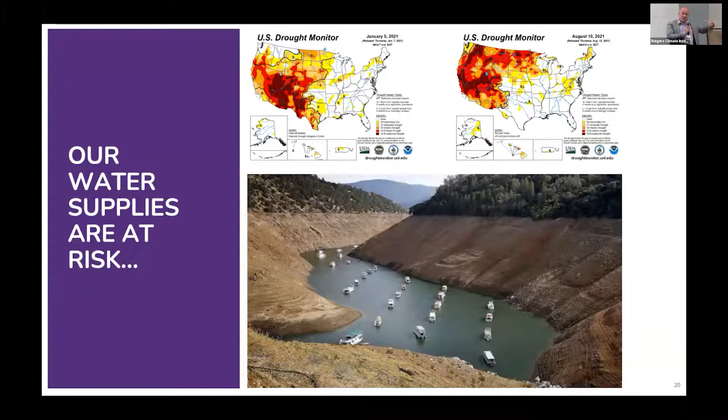Those maps on top of that screen that you're seeing there are continuing to get worse, continuing to get more frequent. And you'll say, okay, well, we're on the East Coast here, right? And thank you for those across the pond being here as well, but you have some of the same challenges. It's not just a West Coast problem. We have other challenges ahead that are also local conditions that we need to work through together. Go to the next slide.

So as Yasmin really nicely put into context the city of Hoboken, this is happening more and more around the country and around the world. This is a picture showing a wastewater treatment plant that is completely underwater, right? And so we had Hurricane Sandy on the East Coast, which really impacted everybody in the eastern US. A couple of years after that, we had Hurricane Harvey, right? That was really impacting the South Central United States.

And just recently this year, a couple of months ago, we've had Ida, and Ida impacted not only the South Central, but also the East Coast. And a lot of recovery efforts are still going on. So this campus itself was under a lot of water. Towns around here were inundated under a lot of water. And this is happening more and more, getting more frequent, getting more impactful to those communities that are around us.

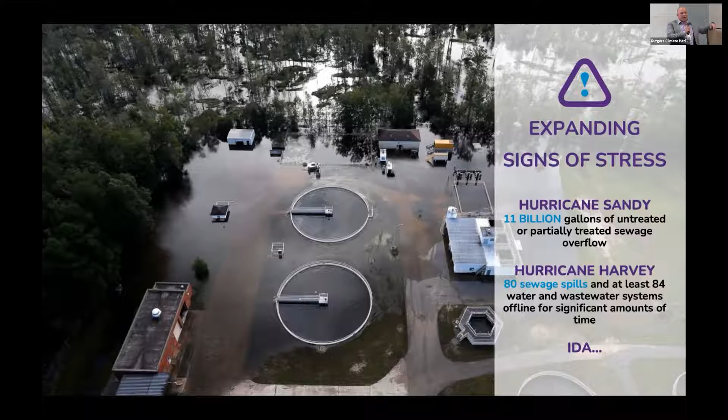So what can we really do about it? How are we going to manage this going forward? Slide. Right. So I work for a company called Natural Systems Utilities. We design, we build, and we operate local, community-based, decentralized water treatment and reuse systems, to try to help with some of these challenges that lie ahead.

We have about 100 systems that we manage for communities in the Northeastern United States. About 80 of those were directly impacted by Superstorm Sandy. Not a single one of those systems went down and violated permit conditions, while we had large centralized systems that were down, discharging raw sanitary wastewater into our local water resources, creating a lot of environmental impacts and personal impacts as well.

And so the reason that these systems didn't go down, didn't fail, didn't violate any permit conditions is because they are local to those communities. They are place specific. We do not have large horizontal pipes that go for miles and miles through many low-lying conditions, where when you have an isolated problem, now you're creating a regional challenge.

Our largest challenge was getting fuel to the generators to keep power to the facilities to make sure they were running and providing clean, affordable, safe water and sewer services to those communities. We were able to work with the fuel stations that were local, keep those generators running, and keep the environment safe and people having access to that water.

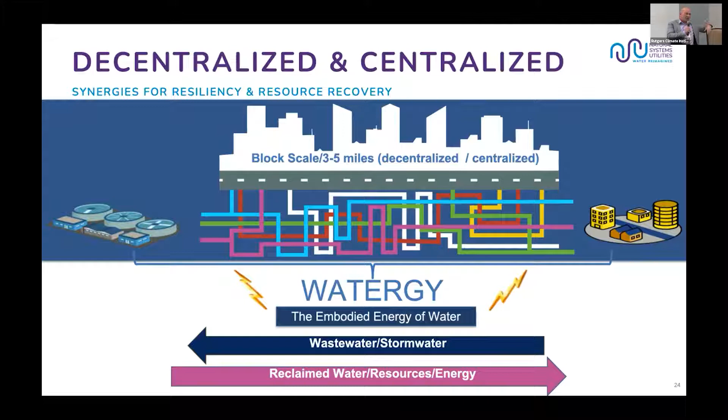So let's use these microgrids, just like in the power industry, create a sustainable supply of that water to reuse it and recover that energy at the same time. So here's some case studies on how to do that. Go ahead. This is a diagram of Battery Park City, Lower Manhattan. And what you're seeing here is the building envelope on the right-hand side.

First, we're trying to conserve as much as possible, use low flow fixtures. All of that wastewater that's being generated is going to the basement of the building. We're treating that right there on site and recycling back up as much as we can for reuse, in the form of flush water, irrigation water, cooling tower water, laundry, sidewalk maintenance. We're reducing our water consumption by over 50%.

But more importantly, we're reducing our discharge into the sewer, many of them overburdened by combined sewer overflows that Yasmin went into. We're reducing that by even more because we're using water for external purposes like evaporative cooling. So we're reducing our discharge into the sewer by 60, 70, 80%.

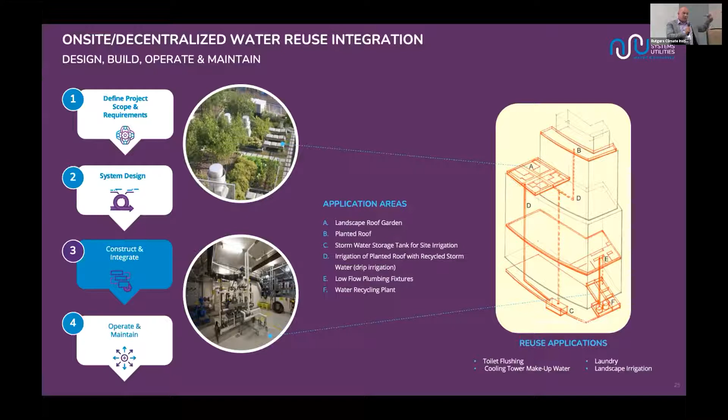And so you can do this at the building scale. You can do it at the block scale. We're going to talk about the block scale in a second as we wrap up, okay? Next slide. Right. This is a process flow diagram about how it's done, right?

We're not going to go through each of the steps, but you'll see all of the uses on the left-hand side. And what many people get confused about is, well, should I do gray water reuse? Should I do black water reuse? Really depends on your local condition, right? Gray is good, I say, but black is better, okay?

When you have more uses, you can get more reuse, more opportunity, the value for that water is better, the return on the investment is better. And you don't have to have multiple pipes and plumbing to separate your gray from your black. So where you do have those types of uses, we prefer to do complete water reuse and take as much as we can and recycle as much as we can.

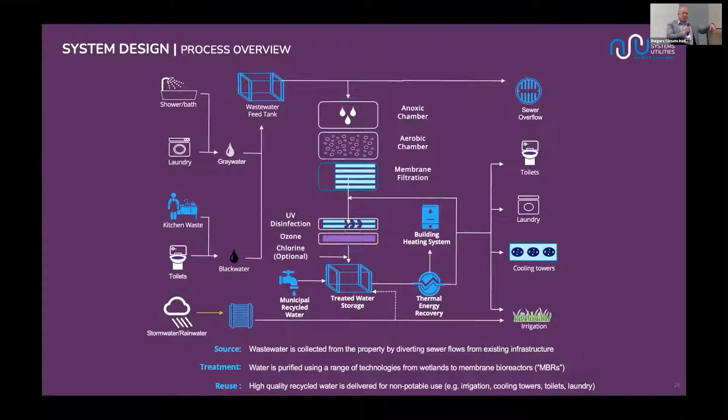Next slide. So what are the results here? This image that you're seeing up on top is Battery Park City. Okay, it's a 92-acre area, about 20 million square feet of mixed use development space, a lot of it urban infill from the initial trade towers. Okay, and we have about 10,000 people living in Battery Park City.

The buildings that are highlighted in green there all have in-building water treatment and reuse systems, reducing their water footprints by over 50%, reducing their discharge into the sewer by over 60%. Okay, so really, really nice example of how you can do things in existing infrastructure, redevelopment areas, and how to integrate these solutions to improve those conditions around.

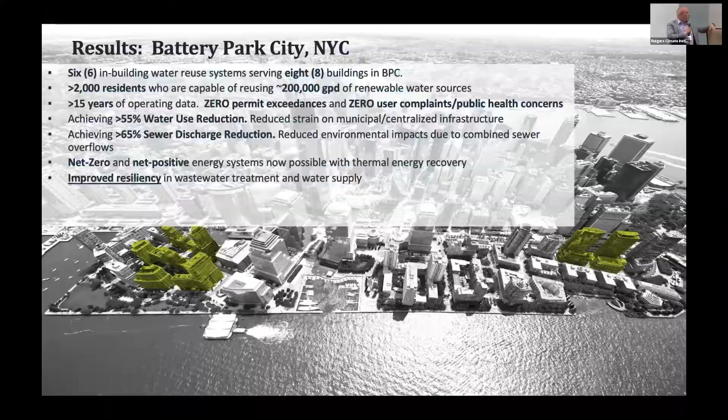Saw this diagram from Yasmin, but bringing even more local context to not only water conservation, but also reduction on our discharges into our waterways. The right side of this is showing you major combined sewer overflow areas throughout the five-borough area, okay, in New York City. So those large red dots, all right, are greater than 500 million gallons a year of raw, untreated wastewater going into the East River, going into the Hudson, okay, when it rains.

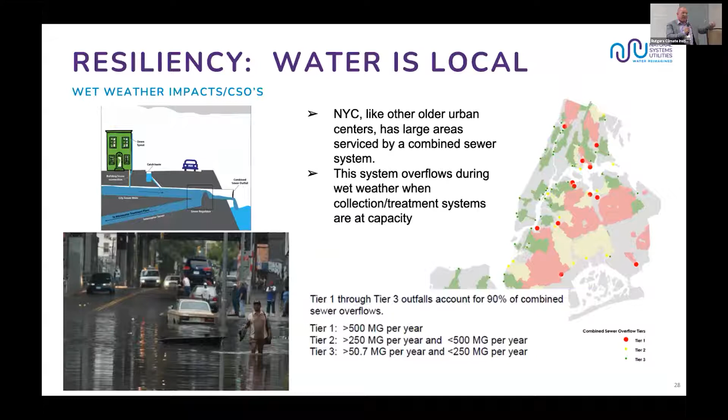We serve 9 million people in New York City, right? We have a lot of wastewater treatment plants, about 14, and over 1 billion gallons of wastewater being treated daily to service this community that is New York City, right? And when it rains, those treatment plants can't handle it. That water just goes out into the waterways.

That overall community is going to be discharging 400,000 gallons a day of wastewater. Right? Problem is, it's a really heavily burdened combined sewer overflow district. So not only are we going to be capturing as much as we can and reusing that directly in the community, we're also going to be treating everything, keeping it out of the combined sewer, and actually putting that into the East River to improve stream conditions. So reuse as much as possible, increase stream flow, and actually make that whole area mitigation for combined sewer overflows.

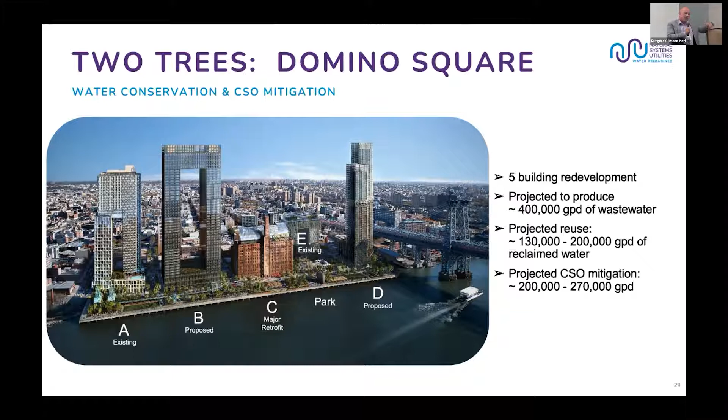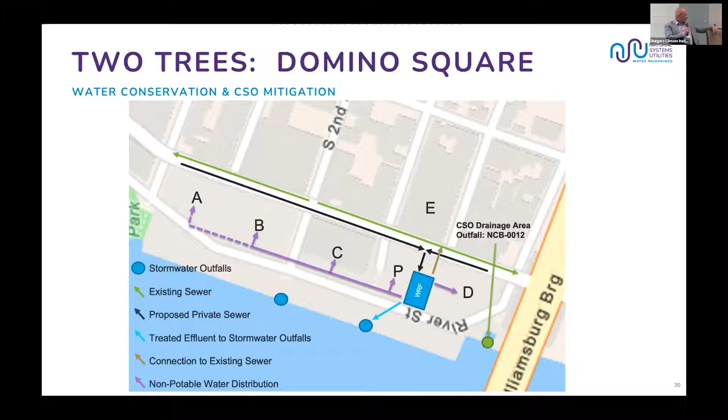And you can see that combined sewer overflow outfall in green is just south of the overall development. So we're going to keep that raw, untreated water out of that combined sewer so that it's all treated going in. Slide.

Right. And as we spoke about, it's not only about reduction in water, it's also how do we integrate our infrastructure to tackle our water energy nexus and tackle our water challenges at the same time as we tackle our energy challenges. When I gave this presentation decades ago, it was, okay, I can see it. This is great from a water environmental standpoint, right? We are treating water, we're keeping it local, reducing our water footprint. That's all great. But aren't you using more energy per gallon of water treated than the large centralized systems? Absolutely true, right? It's like economy of scale, right?

But we can get all of those water conservation initiatives and at the same time capture that energy and reuse that energy as well because all the users are there. We don't have miles of pipeline where all of that heat in that wastewater is just dissipating into the environment, right? I always say fish do not need hot water, right? So why are we discharging hot water into our waterways?

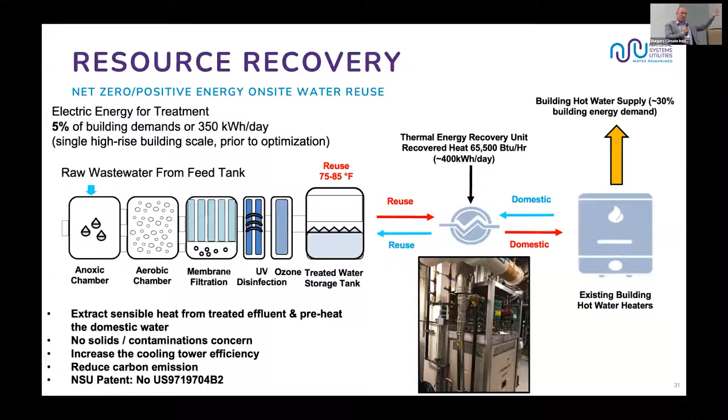Okay, so capture that energy, just like a refrigerator operating in reverse, take that thermal energy out of the water, use it to preheat all of the boilers and hot water needs in the community, and now you have net zero or net positive water reuse, and you're really capturing both of the benefits of water and energy, returning that to the... Next slide.

So in terms of implementing this in your neck of the woods, as you say, a lot of the challenges are, well, my regulations are different, or my conditions are different. Absolutely. Water is local, right? So we put together some guidance documents published by the Blue Ribbon Commission and National Water Research Institute to guide communities about how you do this in your area, right?

What are the challenges to work through? How do you get through some of those public health questions? And how do you treat this water? And what do you treat it to for those specific needs? All right, so take a look. It's published through WRF. You can get it online and take a look through it. All right, certainly here for questions as needed.

And the challenge is because we will need to stop screen share. And Pippa, then share your screen. I'm curious how this is going to work. Yes. Share screen. All right, there you go. Now you can share your screen. Gonna do it. All right. And here you are. And you can see it. Let me go to full screen. Let's see if that works. Let me know if that still works. It's black on my screen. It's black, but oops. Can you see it now? This looks perfect. All right. Okay. Alrighty. Go ahead.

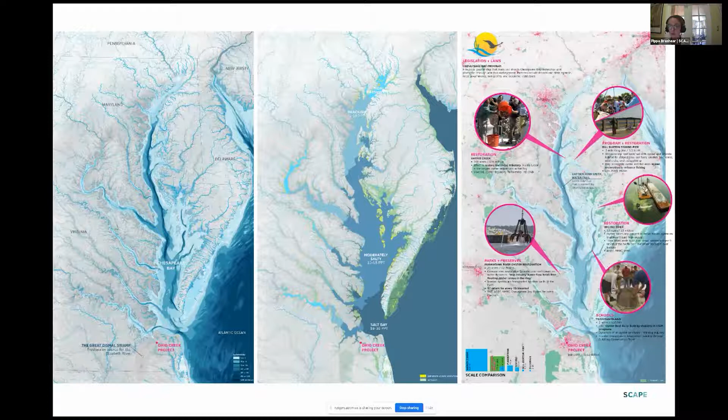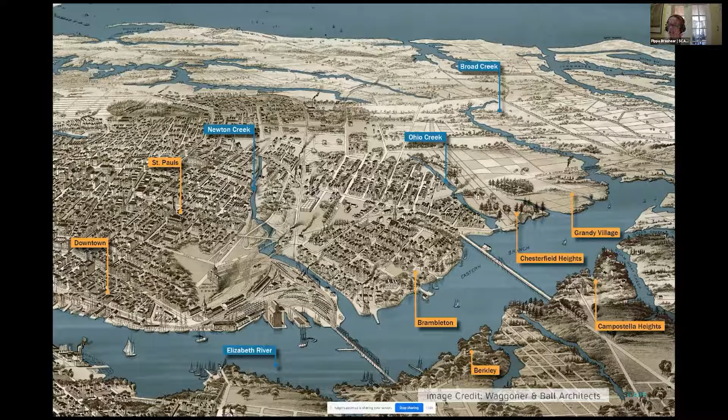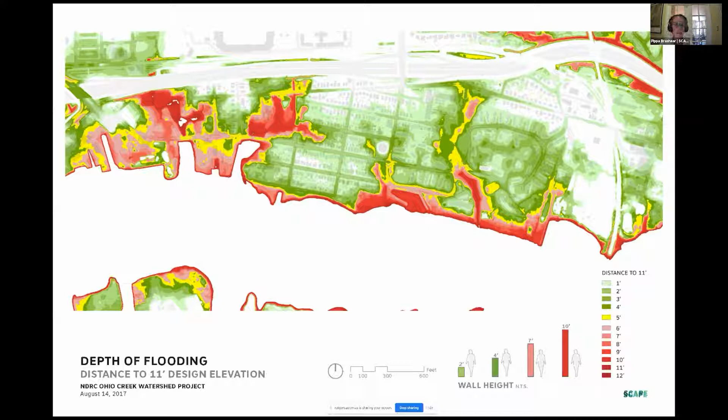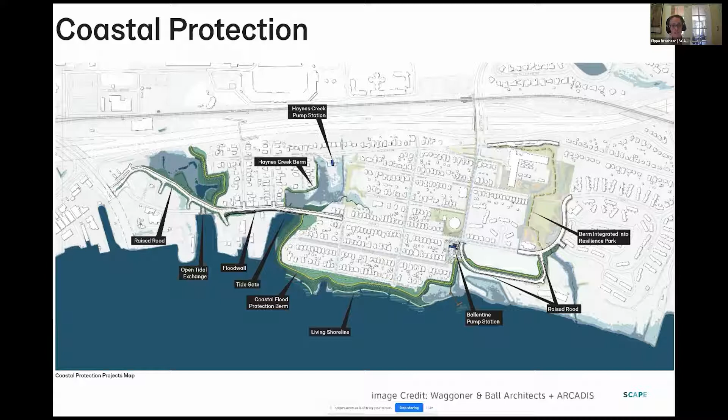And so if I look, this is just a depth of flooding map. You can kind of see these areas that would flood in that 100-year storm event. And they really start to mark the paths of these historic tidal creeks through the community. And so neighborhood-wide, this is a strategy. This is a resist strategy. It's actually very similar to the delay, storage, discharge approach that Hoboken is taking. It is a perimeter protection strategy around some of the areas that are really low lying and buildings can't be elevated, and an internal strategy to manage the stormwater, to delay that, to capture it, to store it, to discharge it through pump stations and locations.

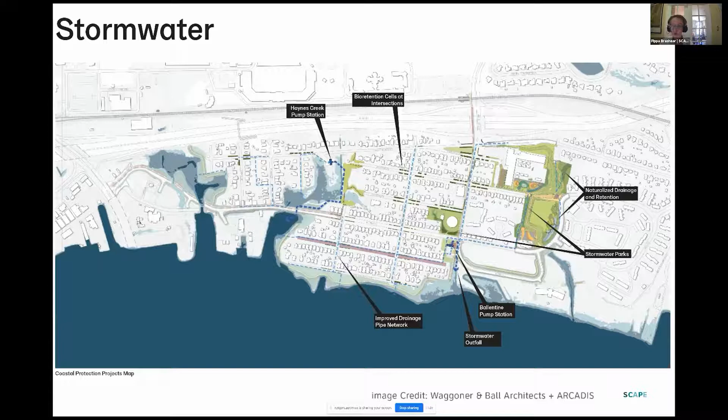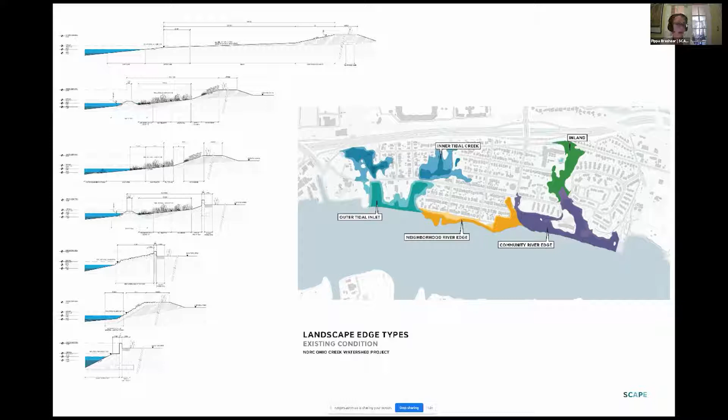And at Scape, we kind of plugged into this larger process. You've noticed some references on the slides. We work with Arcadis engineers and Waggoner and Ball architects and urban designers to really craft and develop this neighborhood-wide plan. But it's one thing to sort of think about the edge, but how is that edge itself resilient, and how does it start to give back and restore some of the ecological vibrancy and the cultural use that people have of the waterfront? And so as we knew that this perimeter protection was coming in, we started to look and develop these different conditions of shoreline that match the use and existing and potential habitats here.

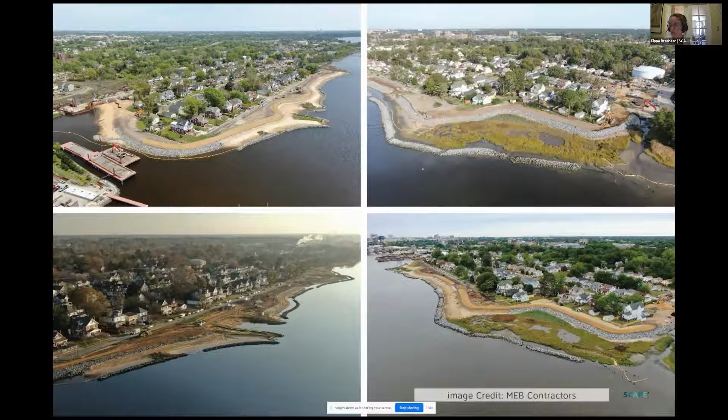But the other piece is, one of the places where the coastal defense was cutting through was a park, kind of in the middle of two different neighborhoods. One neighborhood was slightly less at risk as the buildings were built more recently and were elevated, and they could address it through infrastructure. And the other was very low lying. And so this park was not in the best of conditions, had barriers that cut it off from the community. It was also one of the roots of these historic tidal creeks.

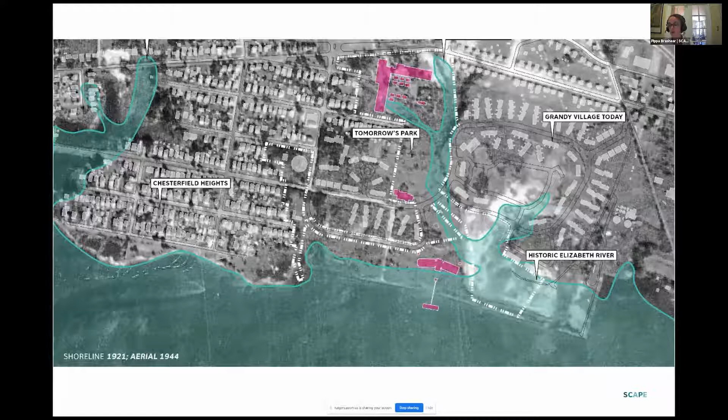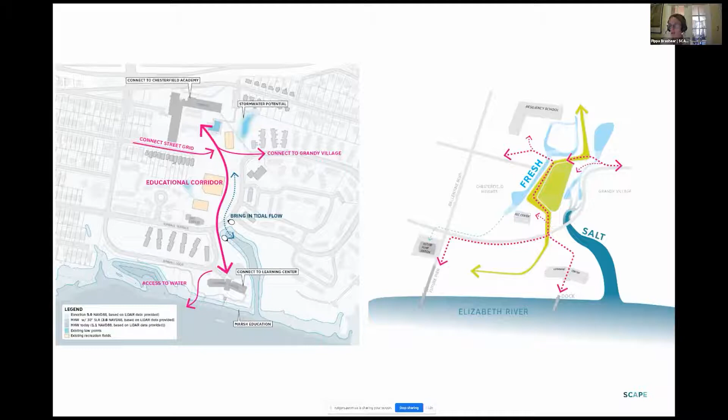And so one of our big assignments was, how do we redesign this park to make it do all of these things, to make it manage water, protect against coastal flooding, deal with the tidal flooding that's coming through this piped creek. And so we said, how do we start to connect the elements around it? A school, a learning center, a learning barge that was on the water, circulation between these two disconnected neighborhoods, as well as integrate flood defense. And it was an opportunity to talk to people about what they want the place to be. This was a park that people used to play ball, but it was actually sort of a divide between these two neighborhoods.

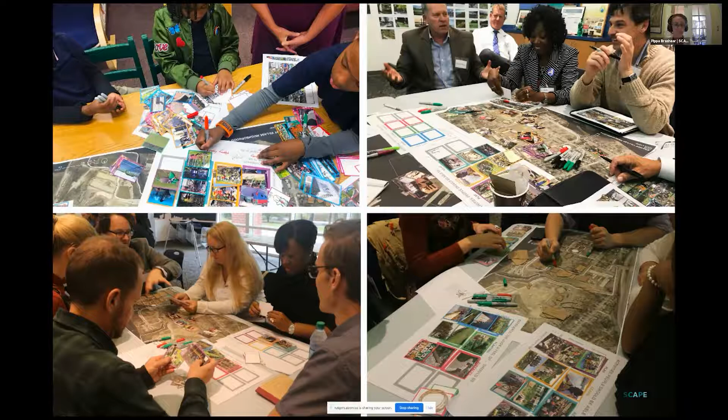There was a whole lot of potential. And so, if you're going to come in, if you're going to transform this neighborhood with this really heavy infrastructure, how do we do it and make it a place that people will enjoy? And so these were just interactive exercises that we worked with people to get at.

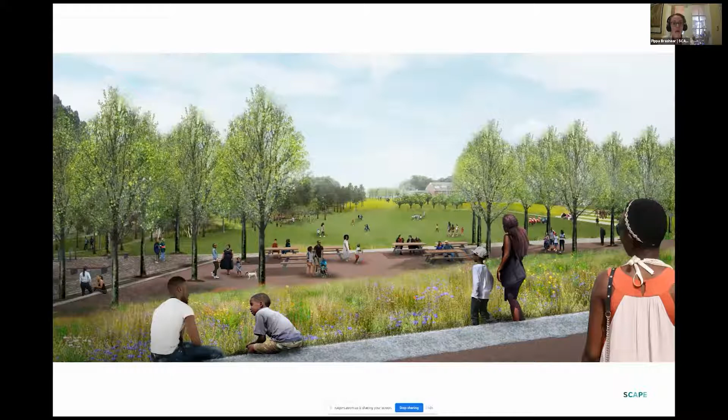And we were able to transform those ideas into amenities and features that people wanted to see as part of this place. Places that brought people together and reconnected routes that were flooded or not accessible in the past, and allowed people to get up and experience this landscape and see how it was working and manage water.

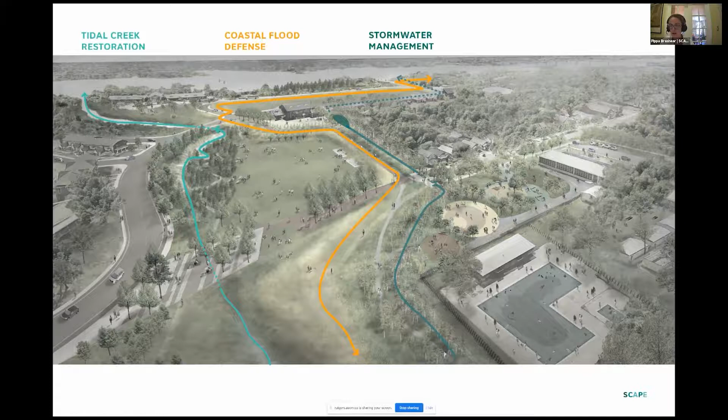and also the restoration of this tidal creek, which helped deal with flooding outboard, but also started to reintroduce people to the understanding that this is a coastal and tidal landscape. It had really been cut off. And you can see water in this picture. This is under construction, but it's already starting to work, right? It's already starting to perform these functions.

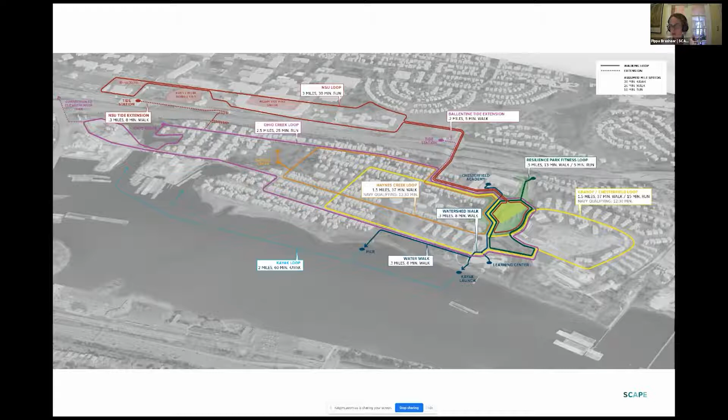And so this idea that this park can be a nexus and a place for the physical infrastructure, but also a place for the social and cultural infrastructure, and do that double duty. And as we're thinking about coastal risk and resilience, and flood risk and resilience more broadly, stormwater too, we really need to think about how these things knit together. It is the end of single purpose infrastructure.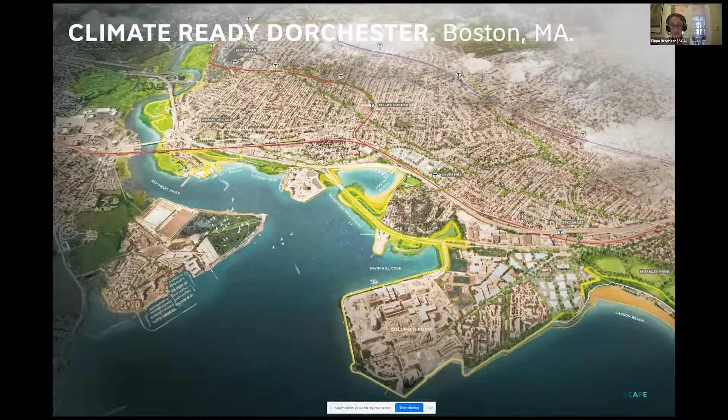And so that's sort of how, again, at a neighborhood scale. We've also had the opportunity to work collaboratively with the city of Boston on their plan for climate change. And Boston has a very robust strategy. They were not as impacted by Sandy as New York or Hoboken, but it was still a wake-up call to them to say, hey, we really need to be proactive and get out ahead.

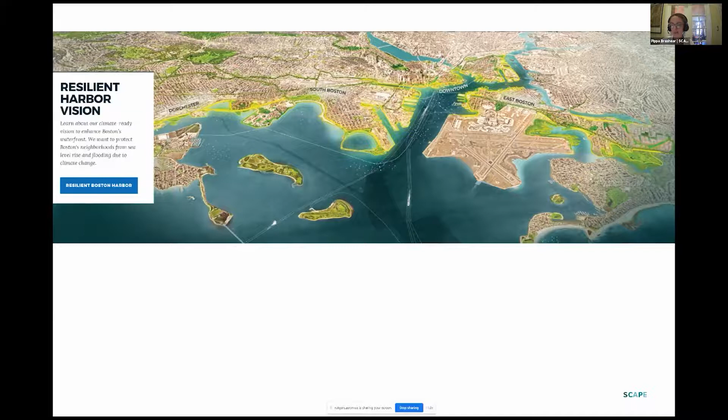And they started a program called Climate Ready Boston, which, in one part, they do have a resilient harbor vision, a vision for the whole harbor that we at Scape worked with them on. And it is a strategy really to invest largely in that edge defense system, and combine that with waterfront access and accessibility. But what they've also done is work in individual neighborhoods.

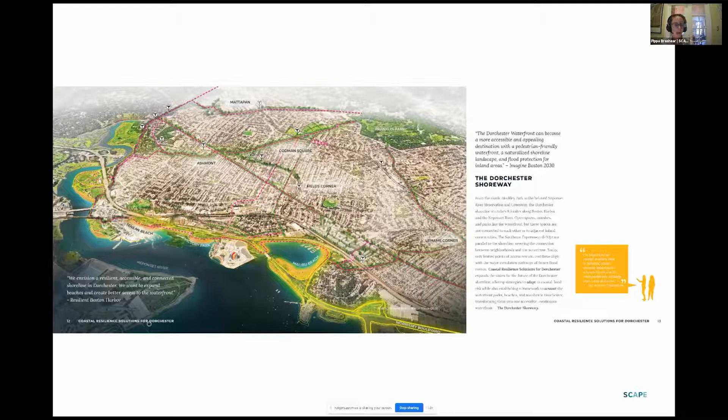And about 2 years ago, we worked with them in Dorchester. Dorchester is the largest, most diverse of all of Boston's neighborhoods. It has miles and miles of coastline, very diverse coastline, and not the sort of dense inhabited coastline that you see downtown, but really a range of shorelines. And what we looked at here was the current condition.

There's actually a fair amount of open space on the Dorchester shoreline, but it is cut off by infrastructure, by highways, by rail lines. And so most of the neighborhood doesn't actually have a direct connection and experience. Unfortunately, that doesn't stop the water from getting in, right? So they're physically cut off, but there are these moments and flood pathways where the water comes in.

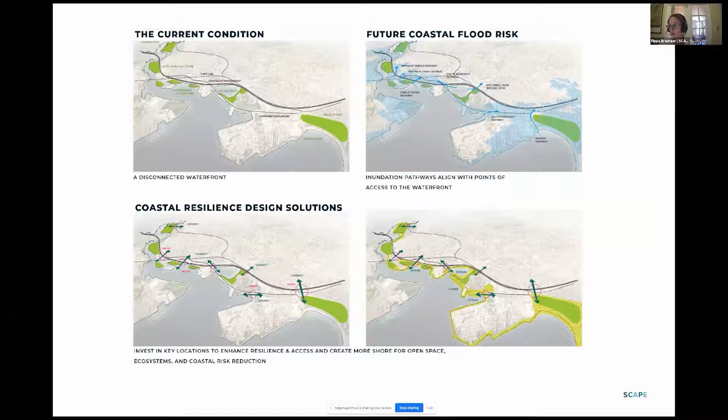And so we worked with the city and the neighborhood to say, hey, what if we focus on these areas? We invest in these moments, but remember, it's not just for keeping the water out and managing stormwater, but creating meaningful connections to the neighborhood, again, to have that dual investment. And that is how the project proceeded. We looked at these physical zones within the larger plan that were defined by the nature of that flood risk.

We let the water, because water is local, we can't make the water do something we don't want it to do. When I first started working on resilience, I was at an engineering firm and I was a landscape architect. I got a really long way just by being able to read a topo map and understanding that water would flow downhill. You can't force it to do what it doesn't want to do.

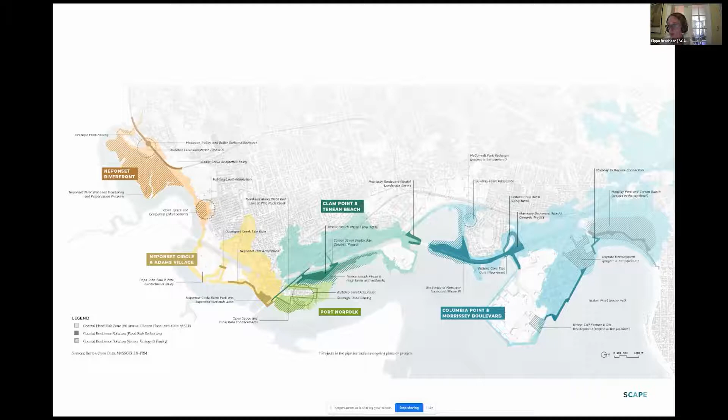And so some places did take that strategy that I talked about with the Ohio Creek project, where we were able to integrate perimeter protection with enhancements to open space and waterfront access to protect.

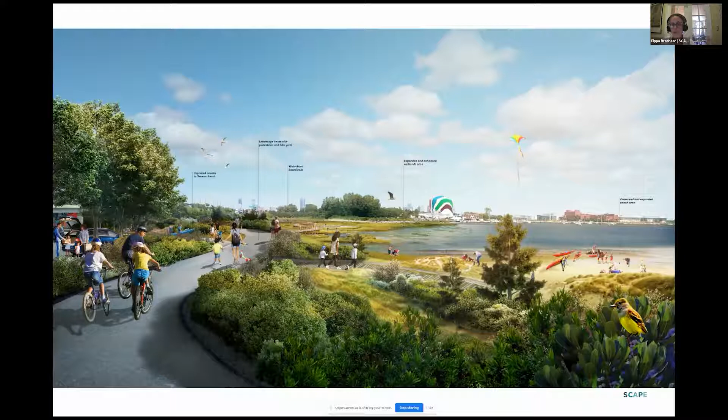But the Dorchester plan, unlike many of the other plans in Boston, started to test some other boundaries and say, maybe we can't protect everything. As we look systematically at our edge, what is the highest and best use? And what does it mean to invest in infrastructure?

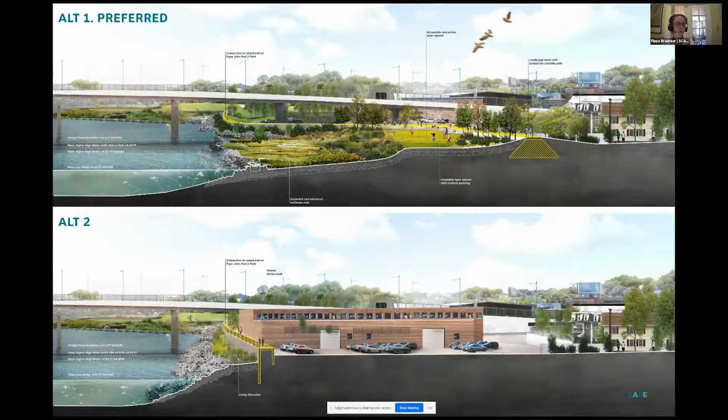Do we want to create a wall at the waterfront and try to squeeze access in it just to save one low-rise building that might not pencil out in 5 years? Or can we start to talk to people about strategic retreat and the trade-offs and a higher and better use for this site for the broader community? So this was one example of that.

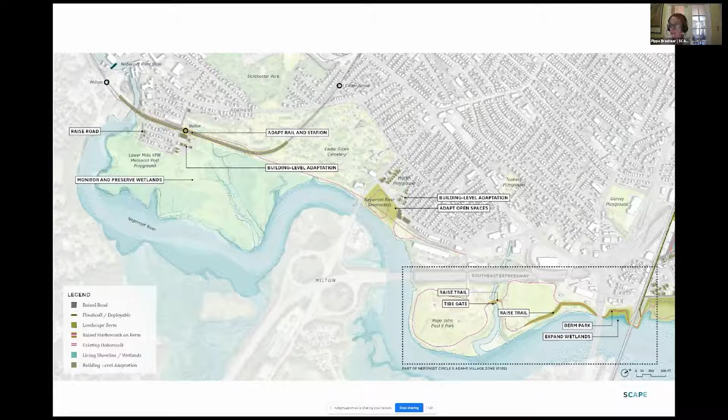The other piece: the back portion of the land is a large, extensive, tidally influenced river with extensive wetlands. And we were fortunate to be working with Woods Hole Group, a coastal engineering and modeling firm, as part of this. And you'll see in this upper portion, there's a broad swath of wetlands that exist today. However, with sea level rise and the lack of sediment supply for these wetlands, if we just didn't do anything, they would go away. They would be drowned, and they would cease to exist.

And it might not seem big, but here it was the difference between a transit stop flooding and not. So that could change the entire dynamics of investment for infrastructure over the next 50 years. So what I want to say about this is, we need to think not just about how we're directly designing places, but new ways of thinking about how we're working with landscape systems that change the whole dynamic and investment in our places. As designers, engineers, and landscape architects, we need to step away from just directly designing to how we engage with these dynamic systems over time.

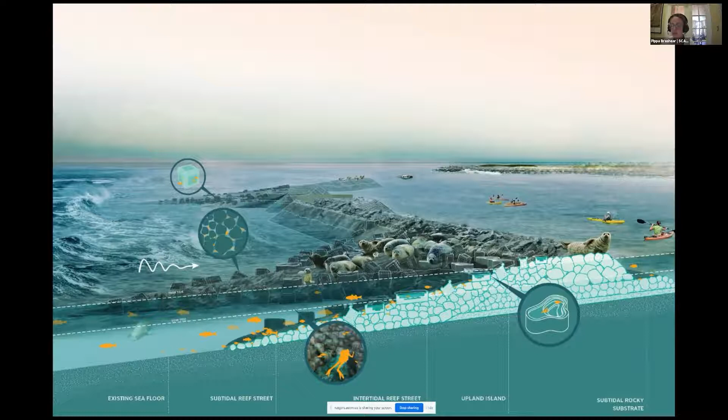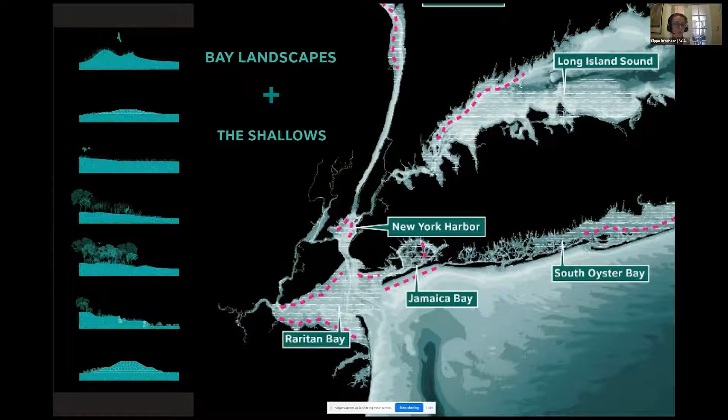And just to briefly touch on one of our more well-known projects at Scape that I think embodies this idea: Living Breakwaters. This is a network of breakwaters, these rubble mound structures off the coast of Staten Island. When we first thought about this project, we were really looking at how not every area can take that perimeter approach. They can't necessarily keep the water out and manage it behind. There are these shallow bay ecosystems connected with communities that might be lower density, that might have that critical connection to the water as part of their economy.

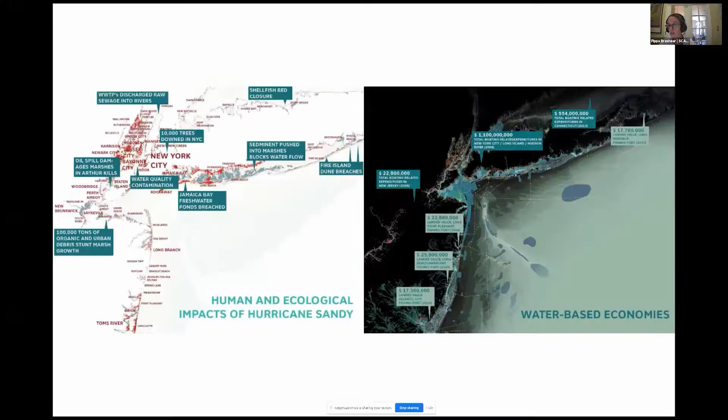And how can we think about the connection of a really targeted, place-specific, local attitude towards risk with the local culture and the local ecology? And that's what the breakwaters did. In Staten Island, the South Shore, you get a lot of flooding, but two of the bigger issues here: it's one thing to have a couple feet of water in your living room. It is a totally different thing to have your entire house knocked off its foundation and members of your family swept out to sea, which is what happened during Sandy here.

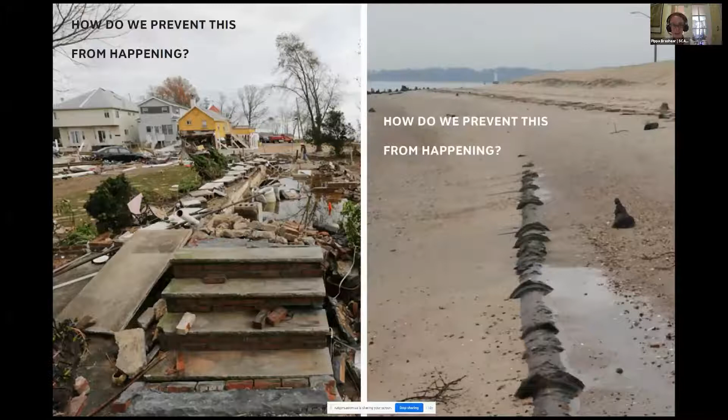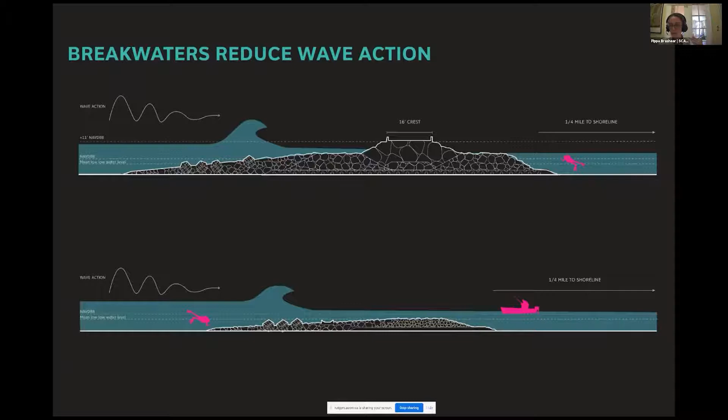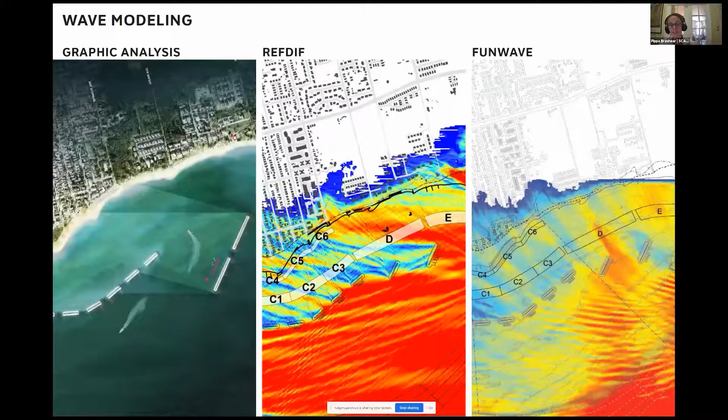So we're not actually intervening on shore, we're intervening offshore with dynamic processes to change and shape the landscape on shore. And as we do that, we also need to be thinking about what we're designing for in the water. Who are we designing for?

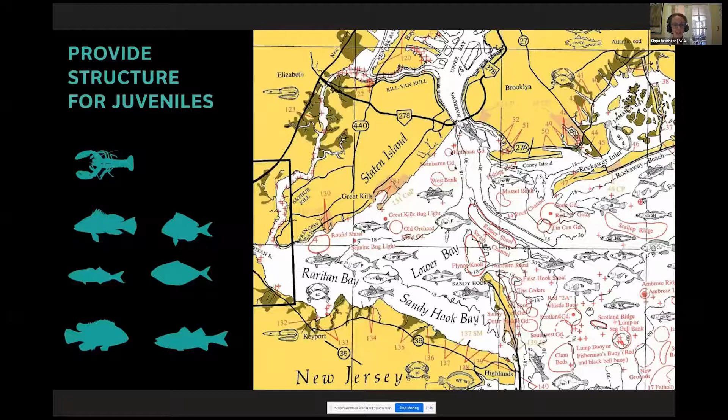It's not just people, it's the fish and other aquatic species that inhabit it. These are our users that we're also designing for in this aquatic environment. And so we developed techniques and strategies of integrating habitat through complexity of structure.

And sorry, I'm talking fast because I think I'm over time.

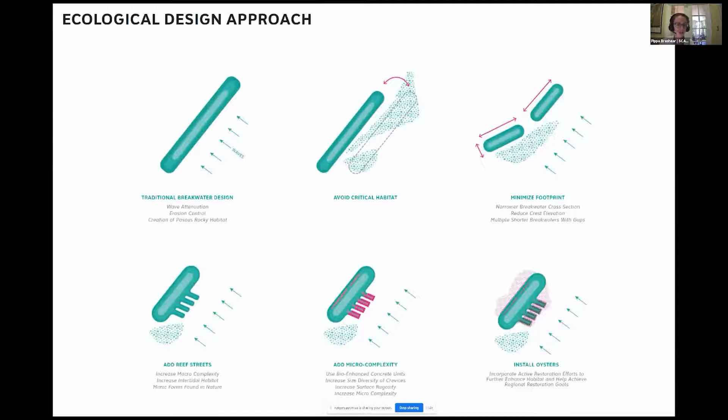And integrating in ecologically enhanced armor units and features to build up a breakwater that was not a traditional breakwater, but one that is not an oyster reef, but it serves many of the ecosystem functions that did. So we're enhancing the environment around it. But this is also a cultural aspect. The town on shore was once surrounded by oyster reefs that did help buffer the shoreline and keep that erosion, but it was also a fundamental part of the economy.

And so what this project has also done has been able to allow people working with the Billion Oyster Project in New York to pilot oyster restoration techniques that could be applied to the breakwaters, to start to use the breakwaters as a teaching tool in the schools for the regional ecosystem and risk reduction, hands-on, and this is the idea once they're done that they will live on. And also, which we came up with this idea pre-pandemic, and it was a lot more useful than we ever thought it would be, to create an online STEM curriculum that uses the strategies and methods of the breakwaters to engage people.

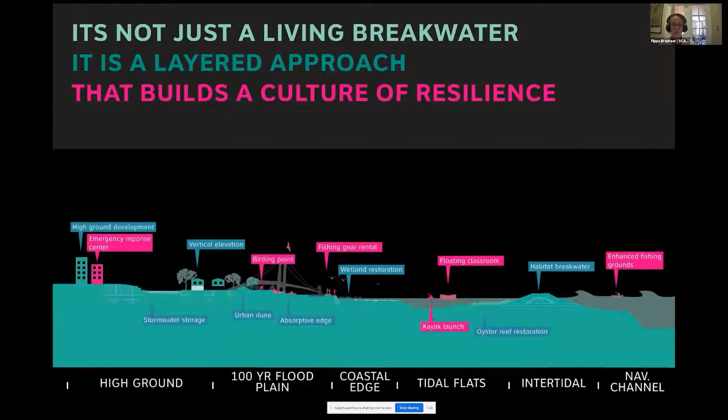And they are under construction. So it's not one piece, but it's this layered approach that really builds that culture of resilience. And so that was really focused on flooding, but I hope that's just some lenses on the way we can think about designing with landscape systems to build that climate resilience.

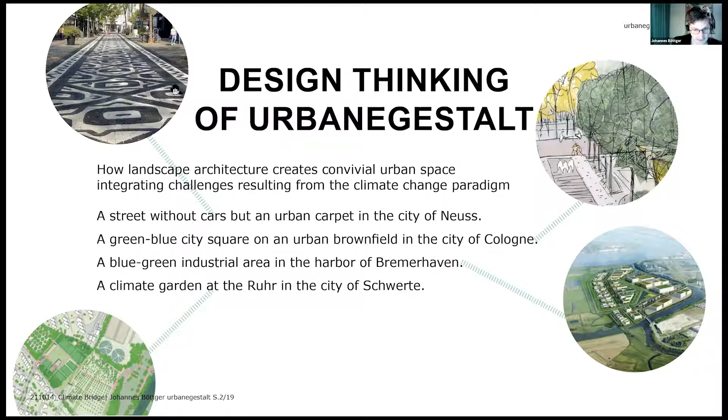And all these projects are linking to the typical German discussion on climate mitigation and climate change, and are all situated in different towns: some are in the Ruhrgebiet, some are close by at the Rhine River, in this region, Western Germany. And I start off in Neuss. This is a project which I know because I'm not the planner of this project, but I'm in the advisory council for the urban design questions of Neuss.

And in the middle, you see one of the typical German agendas. It's called Neuss Klimaneutral 2035, and it's really a very complex paper that is aiming at being a climate neutral, carbon neutral city by 2035. And I think you know how ambitious that is. In Neuss, for example, they're aiming at taking out 90% of the carbon tons a year that they are having right now. And we all know that this will be a very, very difficult way to go. But it's most important to start it off.

And in Neuss, which is traditionally a very industrial town, they started this discussion off with a project in Sebastianusstraße, which is this little road in the very center of Neuss. And taking out traffic was a very difficult agenda, and there was a lot of protest about it. And that's exactly how this project is to be characterized. It's a project that is starting off a discussion. It's about debate. It's a very cheap project. It's 5,000 euros. So it's only color, and it's also temporary.

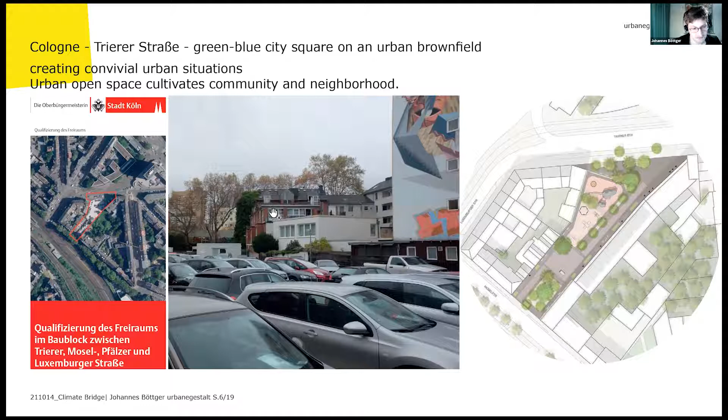And on the right hand, you see the idea how to create something that is actually doing something for community and also for the climate mitigation of a metropolis. In a small competition, we handed in, I think it was 5 competitors, and I believe that actually they chose our design because we had the bluest and greenest design.

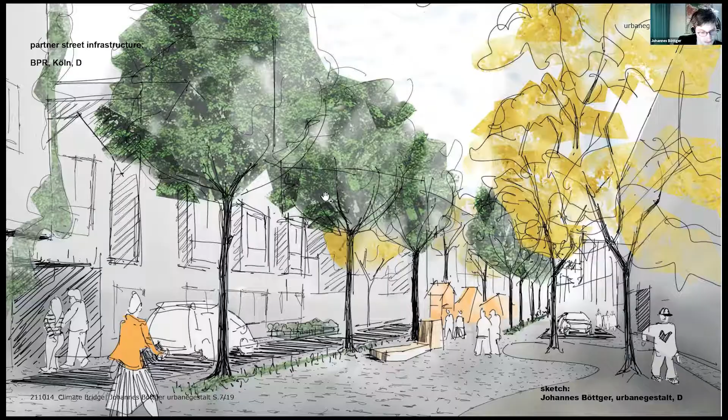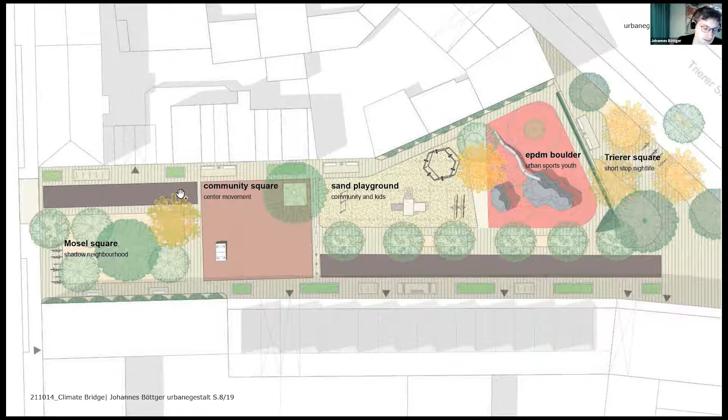And then play, also child play, is a topic that is integrated. And on the right-hand side, you see again a shaded, not shady, right? A shaded square in the middle of the development. So it's these super small but super important little steps in going away from a very urban and fully closed square typology into something which is green and blue, keeping the water being modeled in a way that we can collect stormwater and in critical moments, that we have permeable soils

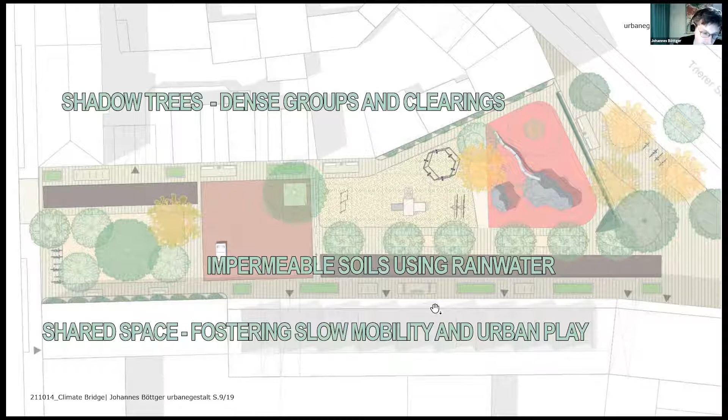draining the water. And when we talk about streets, we tried to speak about shared spaces that are fostering slow mobility first and allowing, of course, cars where they are necessary, but fostering pedestrians and bikers. Now, this next project is really different in scale. It's when we talk about all these integrated concepts of climate adaptation and mitigation. This is now the industrial sector, which is also about a third of the problem. The use of energy, of course, is in the main focus.

And here in Bremerhaven, the Lune Delta development is fairly large. I tried to get our hectare thinking into square feet. It's 16 million square feet. And if I'm not completely wrong, it's about half of the size of Hoboken. Well, I don't know exactly about these numbers, but I'm trying to get the square meters across the Atlantic Ocean. So it's really a very large industrial site.

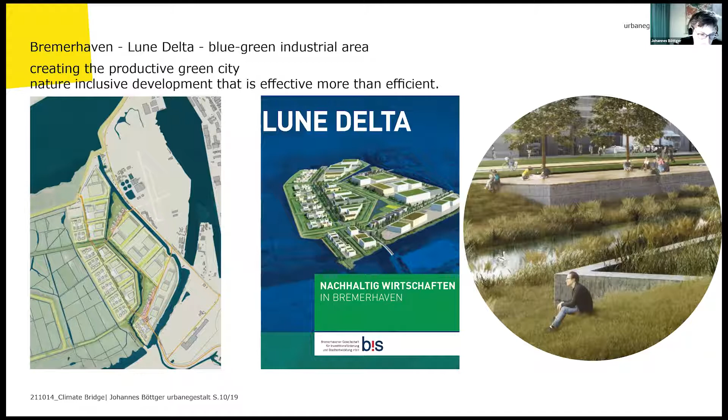It's a project that we did together with City First, from the very first conceptual thinking. It's thought as a cyclical urbanism, integrating a lot of big scale water features and integrating a very complicated energetic network, so that we basically come out with a balanced carbon-free industrial site, embracing a lot of ideas of the cradle-to-cradle technologies and thinking. For the landscape part, of course, the water and flooding issue was the main task and main focus, and you can already see in the master plan map that it's taking quite a big piece of it.

And you already saw that. I put this in to see the relation to Bremerhaven, which is on the top right. So the river is called the Weser, and it's going to the North Sea some kilometers from this area. But we are behind the dike. So in difference to what we heard before, Hoboken and Battery Park, and also Pippa's examples, this is behind the dike, so it's not directly.

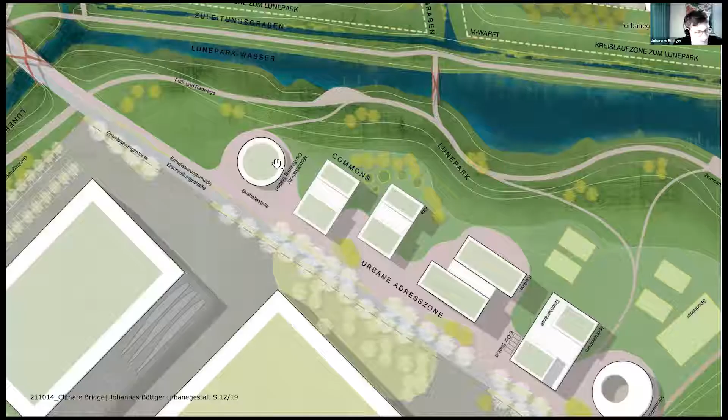There's no direct flood risk on the dike. Along with the Lune Park, which is a park working in different terraces, actually keeping all the rainwater that will be coming in the industrial zone, and then slowly giving it out to the river system of the Weser, which was number one of the landscape issues.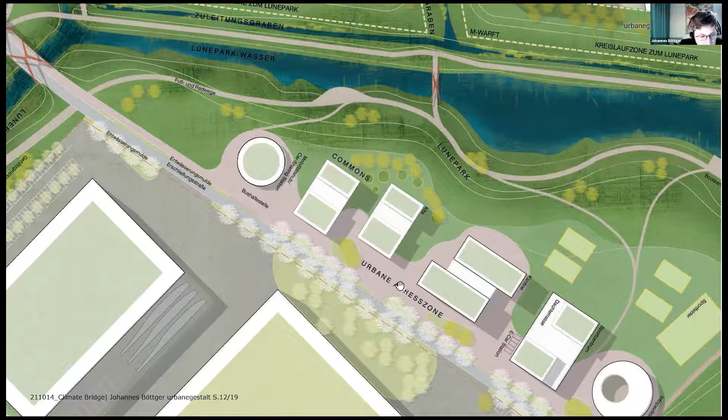Number two was the so-called commons. So we're creating two large parks, including mobility hubs, including kindergartens, including features that are actually connecting that industrial zone and making this industry area something which is much more a city. So that was for us also a very important idea, that we have to get away from single purpose zoning into really complex urban situations, even if the focus is on industrial use.

Here's some of the drawings concerning the water canals and water features. And you see that from this +1, it's actually +1 of ocean level, because we are directly at the sea. We have about 50 centimeters that will be on normal flood, and 80 centimeters that is there for exceptional flood risks. And of course, then some of the infrastructural pieces or some of the meadows and park zones will be flooded for moments. But of course, that's exactly what we are aiming at, integrating these two issues.

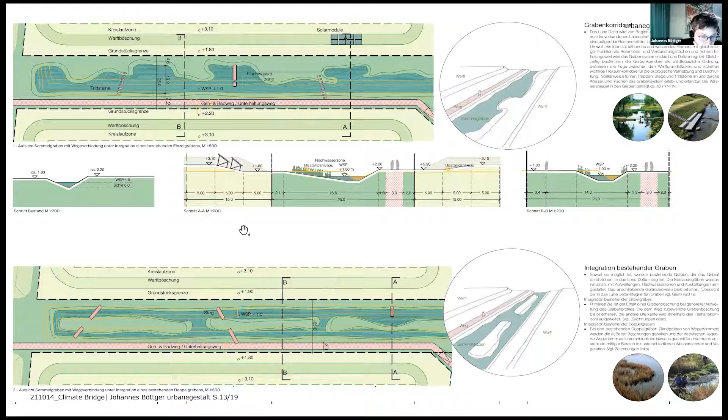And this is an image that is putting the landscape that we found in the center of a design for this new to be overbuilt industrial zone, integrating this idea of rainwater storage and rainwater treatment in the very heart of the industrial zone, and making it a space to experience and a space to be, not only for the people working there, but also for the rest of the city that might be there for a visit. So it's this cyclical treatment, which is really in the center of discussion, and then also it's creating place in an industrial zone.

The last spotlight I want to put onto a project which is under development for the Internationale Gartenschau. It's a garden exhibition, but maybe Wolfgang can explain that better. The term garden exhibition is not really fitting well. But for 2027, this one is supposed to happen in the Ruhr zone, and it's a multipolar exhibition. And one of the cores is this design for Schwerte, which is directly at the Ruhr River, which is the southern river of the two big rivers.

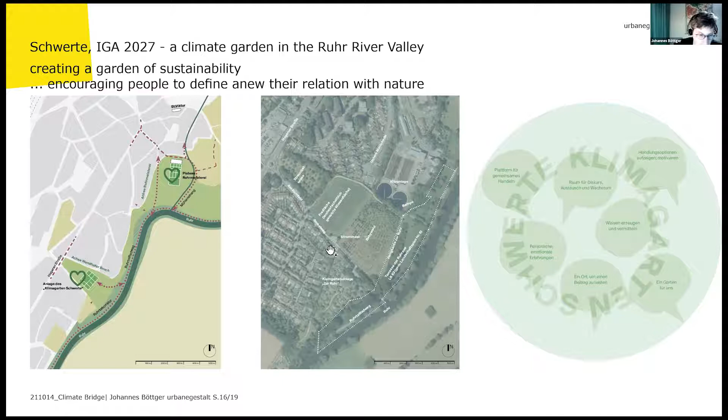So this is an overview of the area. It's a shot of 20 meters height, where you see beautifully the wastewater recycling plant and the Ruhr, and a very beautiful Ruhr landscape on the other side of the river, which is a distinct biotope, and used to be, still is, a water treatment zone. And to have this view, one of the features of the park will be a lookout where you can reach the 20 meters platform plus 80.

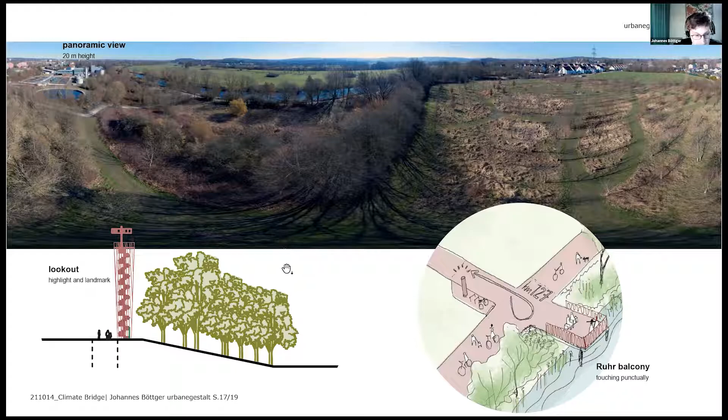And the core of the design is this climate garden, which is consisting of some tiny forest experimental plantings that are kind of creating the place as an internal garden space, fencing off towards the urban neighborhoods. And then it is consisting of 7 garden rooms, which will be developed in combination also with researchers and universities to really highlight different techniques to produce food within urban systems, and to work in cyclical garden systems. So these are kind of experimental fields, and the heart of it is a big festival meadow with a stage and teaching and learning environment.

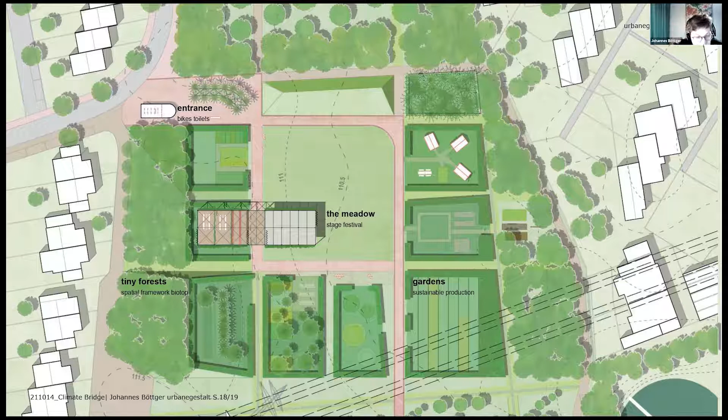So these elements that we know from climate mitigation, like tiny forests with shade and collecting water, mixed hedges, nature inclusive design in the garden on the one hand, then it's really the integration of design build strategies and experiment into a project that is good for learning and communication, and altogether creating an educational park within the urban green system.

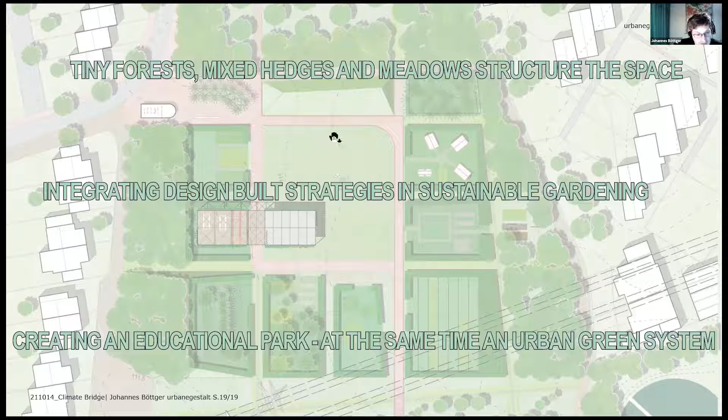So maybe these 4 spotlights highlight a little bit how the climate mitigation discussion is right now happening in Germany, and how Urbane Gestalt is trying to contribute a very simple, positive message that we can create great places in this age of climate change.